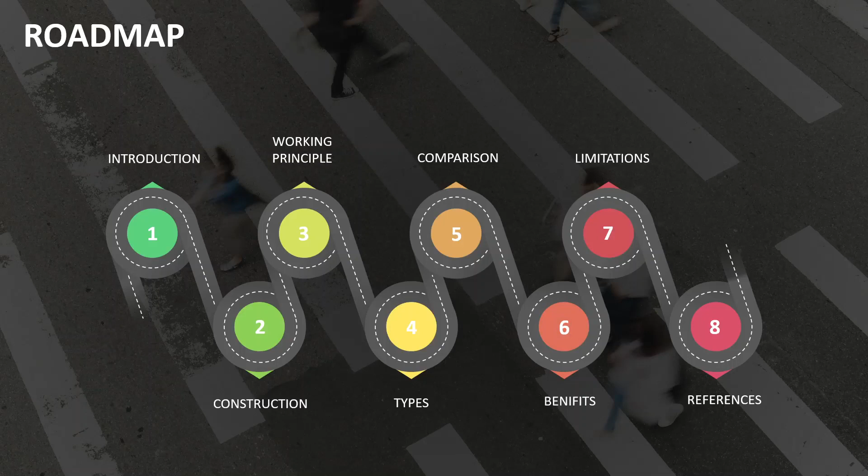Let us jump straight into the roadmap of my presentation. First there is a brief introduction of our case study, then the construction of sine bar apparatus, working principle, its types, and the different types of errors. Then there is a comparison between two sine bar apparatus for measuring the tapered angle of small objects and of large objects. Then there are some benefits and limitations of our apparatus, and at the end the references.

Sine bar is a precise angular measuring device designed to use with block gauges and a flat surface plate. It is also used to locate any object at a given angle and to measure the angle of any tapered object.

This is a more precise definition of the sine bar: a precision face-centered angular measuring instrument that is used along with slip or block gauges. Why do we mention face-centered? Because if we want to measure the angle between two lines, we can simply use any protractor or bevel protractor. But if we want to measure the angle between two faces, then we use a sine bar.

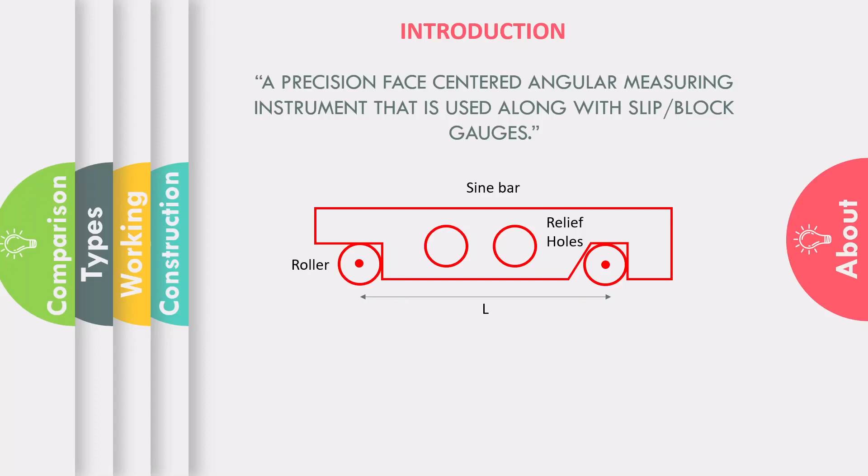Let us understand the basics of sine bar. Sine bar is made up of high carbon, high chromium, corrosion resistant steel. The purpose of selecting this material is to avoid any type of tear and wear when we are measuring the tapered angle. This eliminates errors and maintains the accuracy of the sine bar.

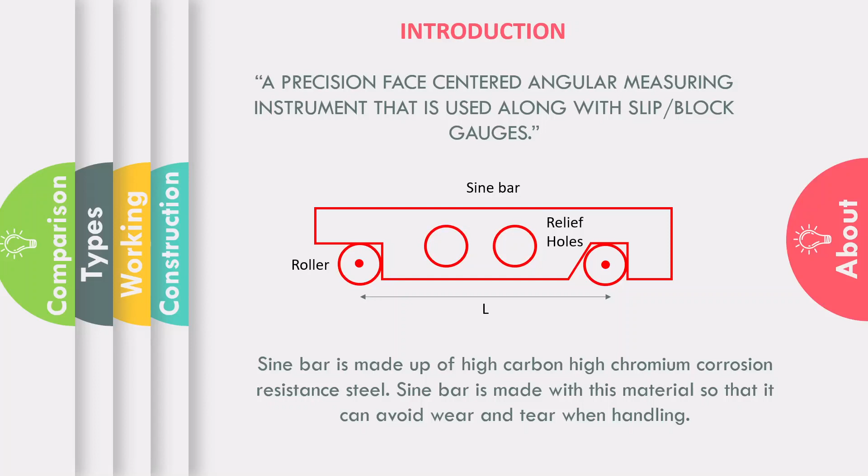This is a very simple representation of our apparatus. We can see our straight steel bar that is called sine bar. There are rollers that have parallel axes. The length of the sine bar is nothing but the distance between two rollers, generally 100 mm, 200 mm, or 300 mm. Some relief holes are provided just to minimize the weight of the sine bar apparatus and to facilitate handling.

This is a very simple construction of our apparatus. We have a flat surface plate, some block gauges to measure the height, our main apparatus the sine bar, the workpiece for which we have to measure the tapered angle, and a dial gauge.

Now, if we want to measure this tapered angle theta, we know that if two lines are intersecting, the angles between those two lines are equal. So this angle theta will be equal to this angle theta. We also know from algebra that if two lines are parallel, they form equal angles with the x-axis, so this angle theta will be equal to this angle theta. Similarly, if these two lines are parallel, the angles they form with the x-axis are equal, so this theta will be equal to this theta. So if we want to find this theta, we have to measure this theta angle.

Now here is a trick. How can we say that we require this much height? For that we use a dial indicator. We have to make this surface of our workpiece parallel to our flat surface. That's why we adjust the height of the block gauges so that this surface becomes parallel to the flat surface. How can we check that?

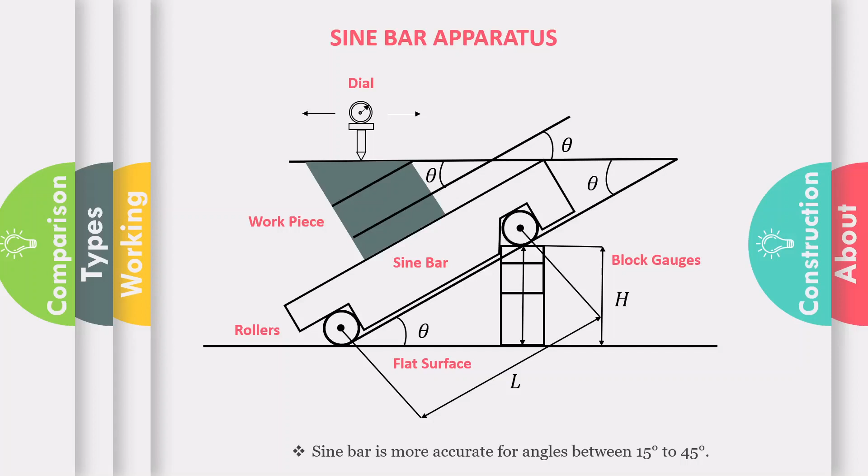Here is the working principle of our apparatus. The principal operation of the sine bar is based upon the application of trigonometry, that is, the sine formula.

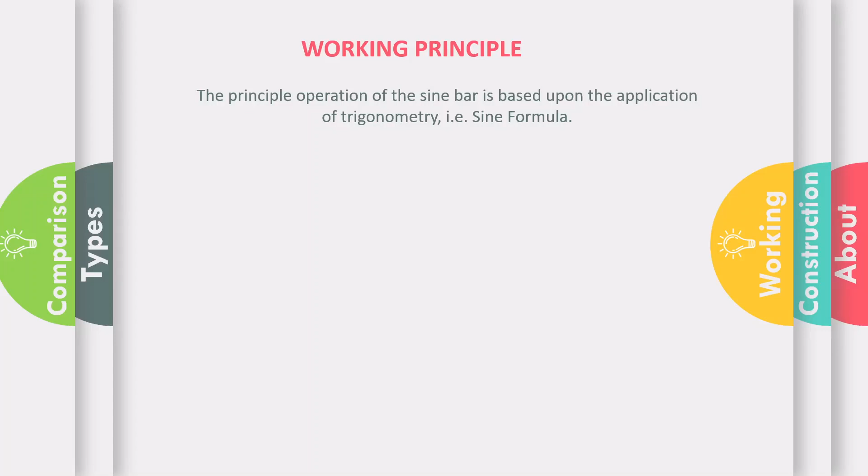Let's suppose we have a very simple triangle A, B and C with a certain height and length, and we want to measure angle theta. We know we can use the formula sine theta equals perpendicular over hypotenuse. Our perpendicular is BC, that is height, and our hypotenuse is AC, that is length. So our formula becomes sine theta equals BC over AC, which equals height over length. If we want to measure angle theta, it becomes sine inverse of height over length, where theta is the required tapered angle. It is very simple.

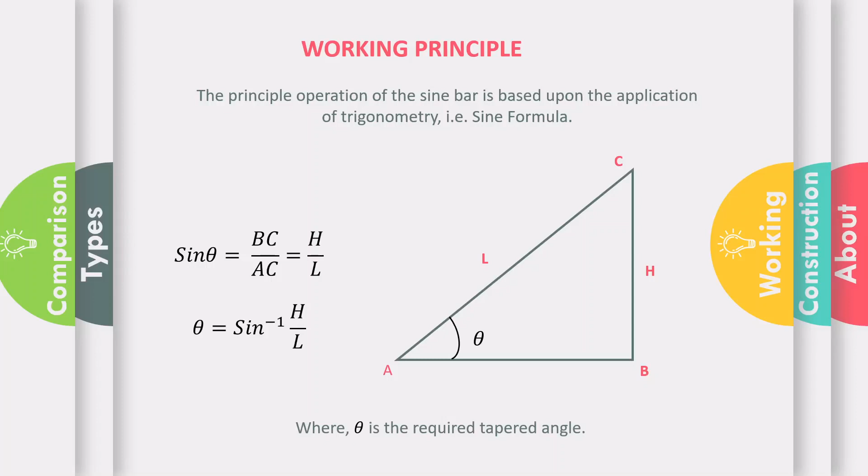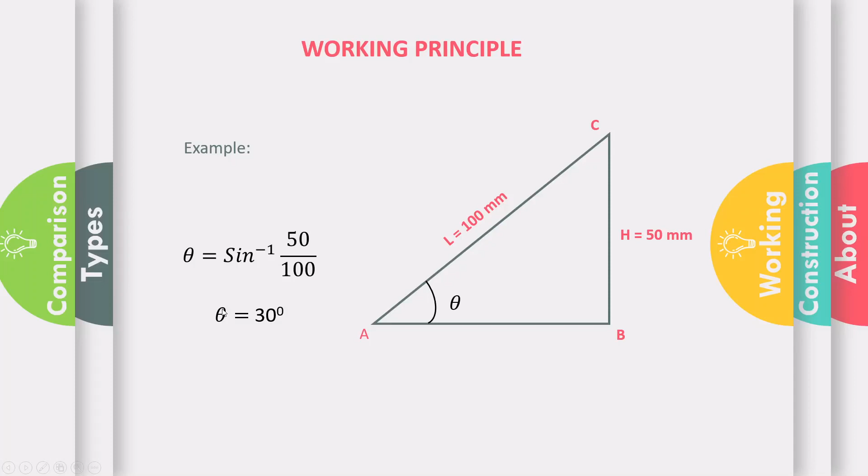Let us understand with the help of a simple example. Suppose we have a height of 50 millimeters made with the help of block gauges, and the distance between two rollers is 100 millimeters. We apply the sine formula: theta equals sine inverse of perpendicular over hypotenuse, 50 millimeters over 100 millimeters, and we calculate theta, which comes out to be 30 degrees. This is our required tapered angle, that is, 30 degrees. Very simple and easy to use.

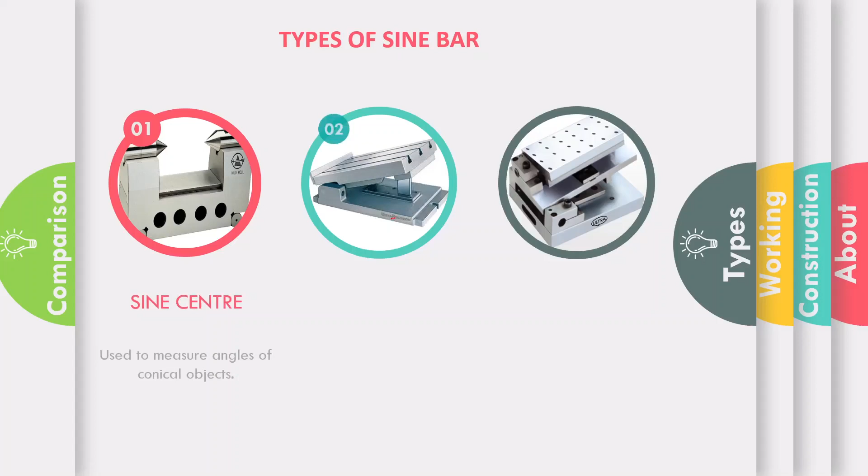Here are some types of sine bar apparatus. First one is sine center. It is used to measure the angle of any conical object. As you can see, there are two centers at the end of our apparatus. Rest of the things are same, like relief holes and rollers. We will place our conical object here, and we will simply locate the tapered angle of that conical object.

Second one is sine table. Sine table is a special type of sine bar that is used to position our workpiece over the surface, and there is some locking mechanism to hold the workpiece at a single position so that we can measure the angle very accurately.

Third one is compound sine table. It is used to measure the angle of large workpieces. Basically, it is the combination of two sine tables placed at right angle to each other, and we can measure the compound tapered angle of any complex object with the help of compound sine table.

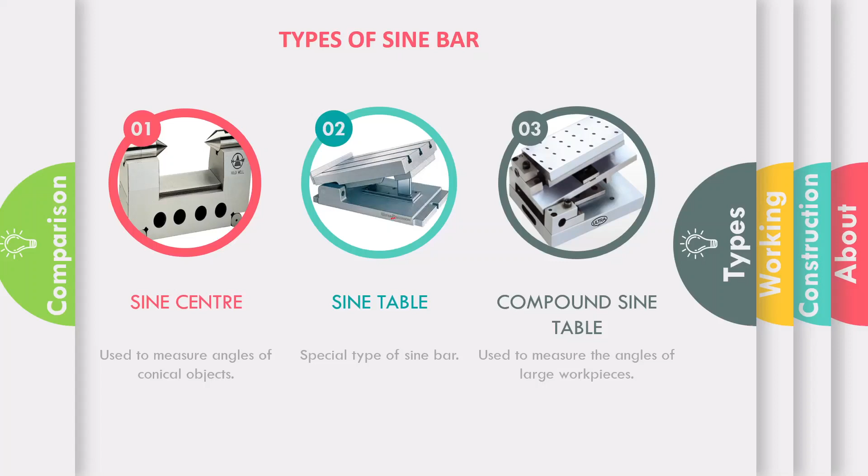There are two types of errors in sine bar. First one is progressive angle error. This error occurs due to the error in the distance of centers of two rollers. To avoid this error, we use pre-designed length of sine bar like 100 millimeter, 200 millimeter and 300 millimeter.

Second one is contact angle error. This error occurs when the surface of component and the roller axis are not parallel to each other. To avoid this error, we use dial indicators so that we can check whether the surface of our component is exactly parallel to the flat surface.

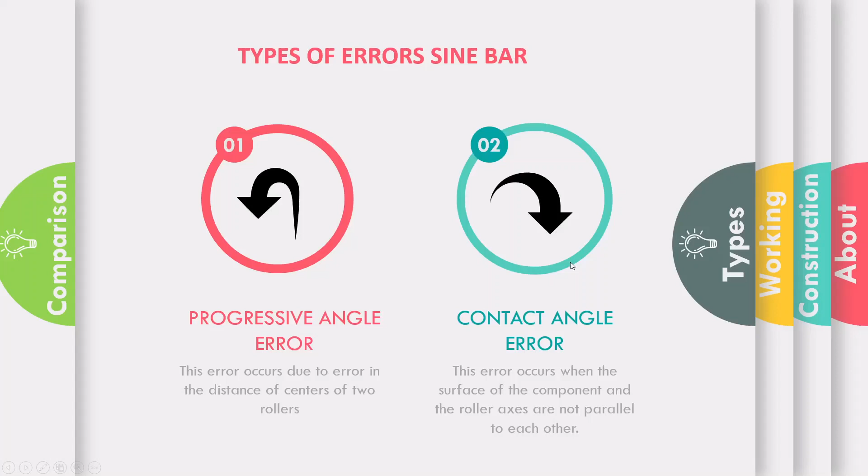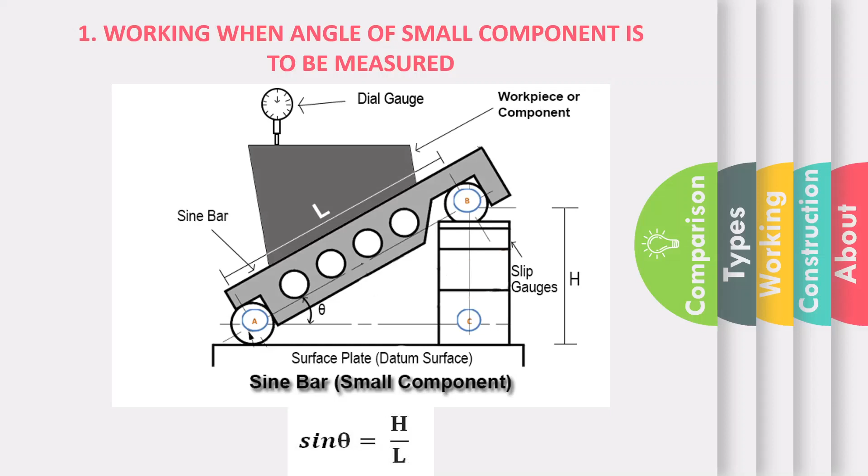This is a very simple comparison for measuring the tapered angle of small objects and large objects. So this is very similar apparatus as we have seen earlier. It is used if the length of our component is less than the length of sine bar. So we will place our component over the sine bar apparatus. Rest of the things are same, like we have to measure the height with the help of slip gauges, and we have to measure the length. We will apply sine formula, sine theta is equal to height over length, and we will measure theta, that is the tapered angle. But what if our component is larger than the sine bar apparatus?

Then we have to use some additional components, like for measuring the height we will use vernier gauge. We will measure the height h1 with the help of this gauge, and we will measure the height h2 with the help of this gauge. Then we will subtract the greater height with lower height to get the actual height. Rest we have to measure the length, and we will apply this formula, sine theta is equal to h1 minus h2 over length. Then we can easily calculate the tapered angle.

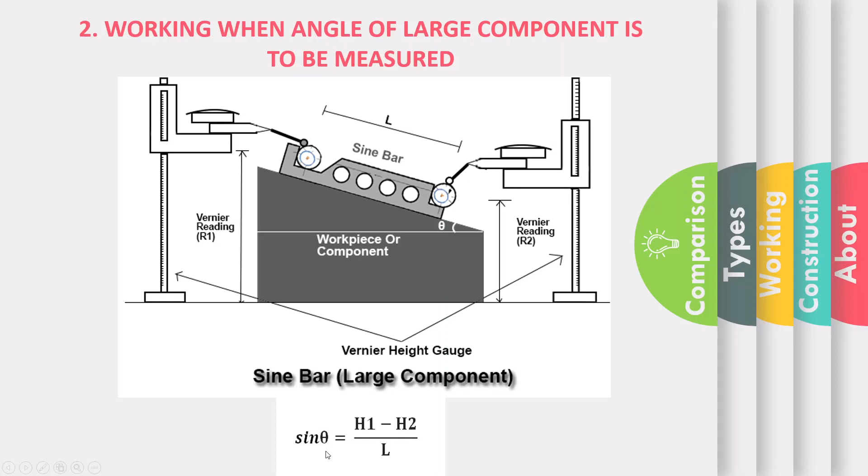Now see, there are some benefits of using this apparatus. First one is it is very precise and accurate. We have other angular measuring devices also, like bevel protractor, clinometer, etc. But sine bar is very precise and accurate.

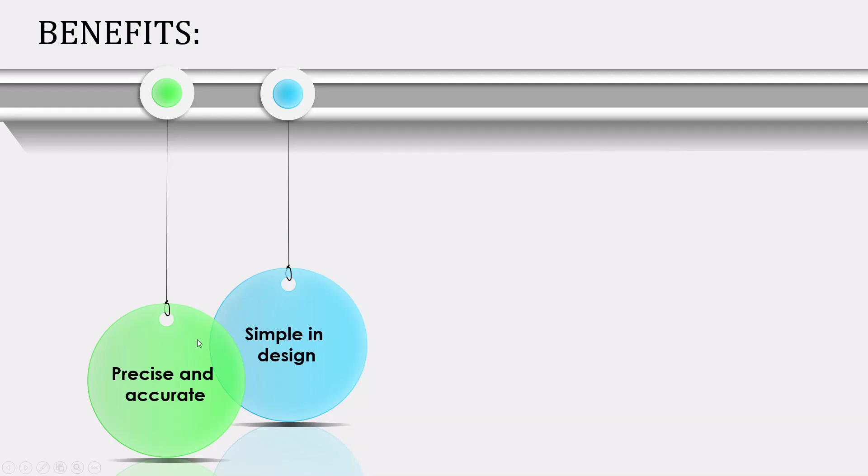It is simple in design. We have seen earlier that we have compound sine table and simple sine table. But as compared to those apparatus, sine bar is very simple in design, and it is easily available. It is very easy to handle and it is very easy to use also.

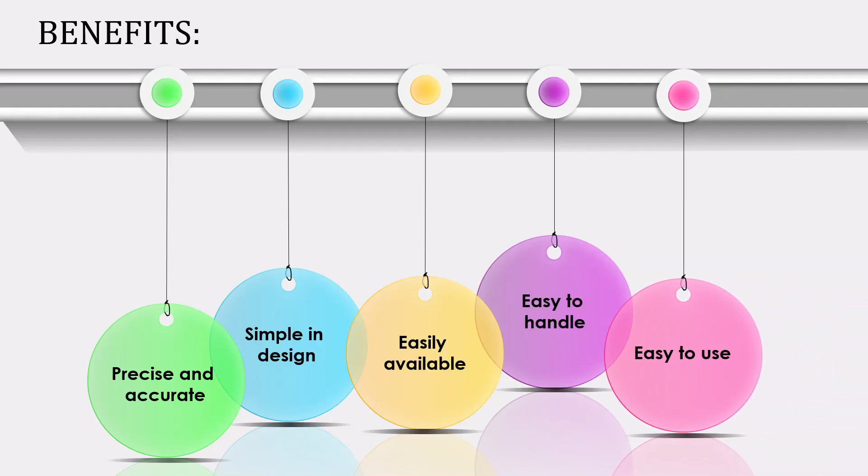But there are certain limitations of using these apparatus. First one is critical angle. It is impractical to use sine bar for angle above 45 degrees. If our angle is large, we cannot handle the rollers easily. So it becomes very difficult.

Number two is position. It is difficult to handle and position the slip gauges. Again, the sine bar becomes physically clumsy to hold in position if our angle is comparatively large. Compound sine table and simple sine table are used to measure angles above 45 degrees, so we can use those apparatuses. Third one is fixed center.

The application is limited for a fixed center distance between two rollers. We cannot vary the length of two rollers when we are measuring the tapered angle of a certain object. Fourth one is errors. Slight errors of sine bar cause large angular errors. If there is a small error in our measurement, it becomes very large at the end. So we have to keep our measurement very focused.

And the last one is projections. Any unknown projections present in the component will cause induced errors in the angle measurement.